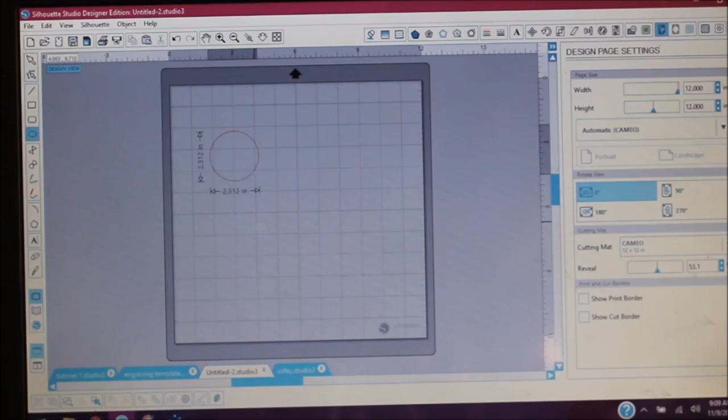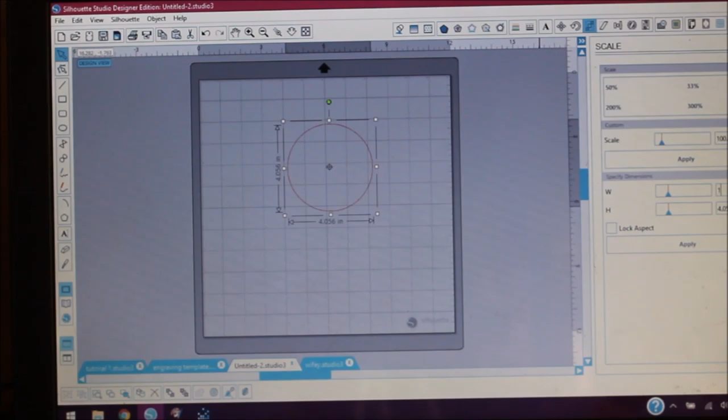Now we're going to select our circle, come up to the scale window, and go down to specify dimensions. We're going to uncheck lock aspect, go into the width and the height, and change that to 1 on both of those. And then we will click apply. As you will notice, when we click apply, it changes our circle into a 1-inch circle, a 1-inch height and a 1-inch width.

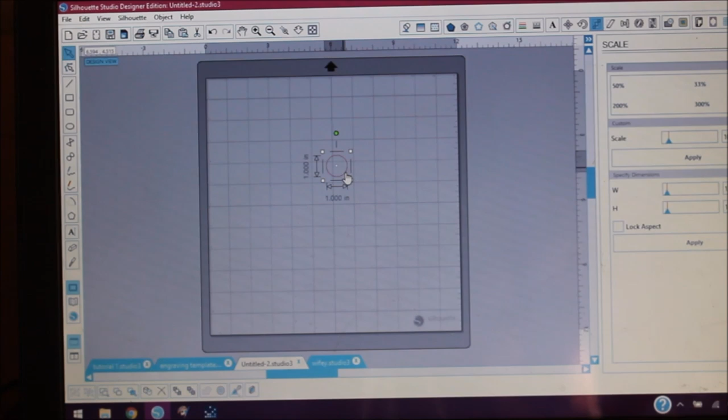Now we want to place our circle where we're going to engrave. When you are engraving, you want to be aware not to put your template or where your piece is going to engrave on up and down columns 1, 4, 6, 11, and 12. This is because this is where your rollers and your black springs are on your roller. If they go over your metal piece while engraving, it will scratch it and your piece will be no good.

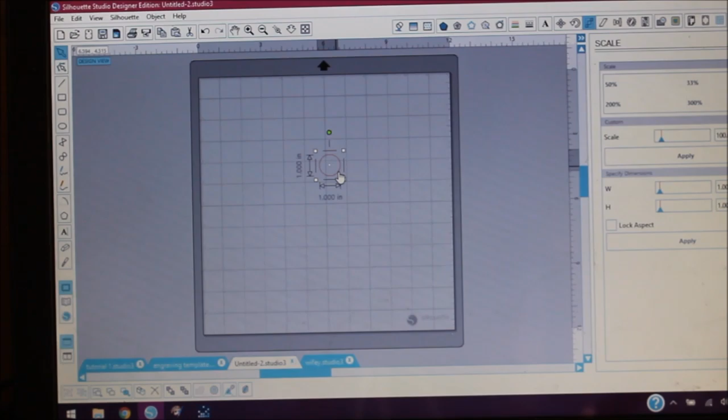Again, that is up and down columns 1, 4, 6, 11, and 12. So now we're going to move our shape. I'm going to go to column 5, and I'm going to go to about row 3.

Now what we're going to do is place our contact paper on our mat so that we can cut out our shape, so we can begin to get our blank placed properly. Now that we have our contact paper cut, we are going to place it on our mat. I know that I have my shape on column 5, row 3, so I want to make sure that my contact paper covers that.

So I'm going to place down my contact paper, sticky side down, your paper side will be up. Take your squeegee after you place it and go through to make sure that your contact paper is as flat as you can get it, and that it is secure to your mat.

It doesn't matter how big or small you cut your contact paper, as long as you have enough space to cut out your blank shapes that you're going to be cutting or engraving on. Just be sure that wherever you're going to place your blank on the mat, your contact paper covers that section.

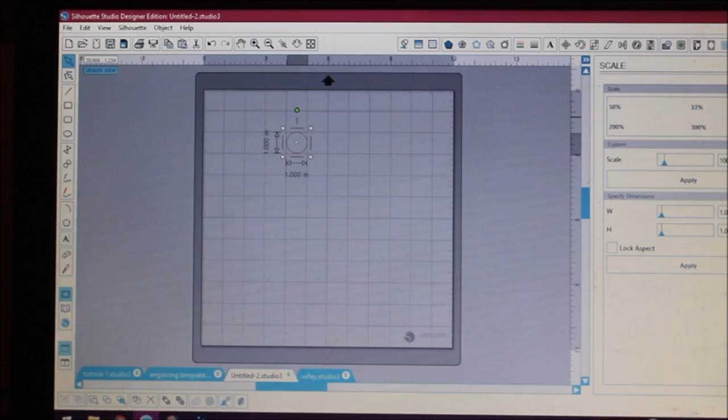Now that we are back in Studio, we're going to select our shape and go over to our cut settings. Make sure that our shape is selected, and we're going to choose Cut Edge. Then we'll go down to Material Type and choose Coverstock.

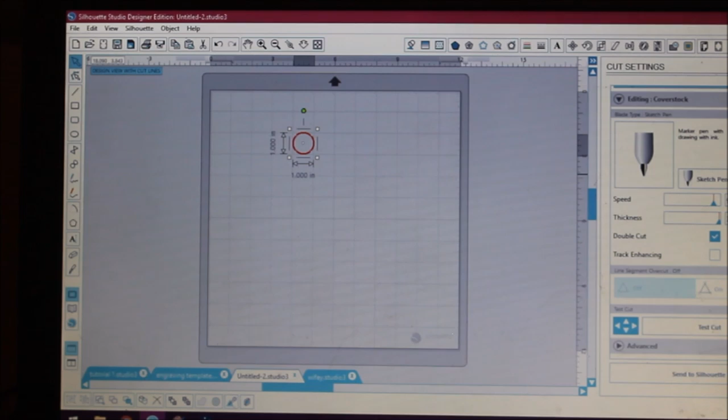Make sure under Blade Type that you click the drop down arrow, and make sure that Sketch Pen is chosen. For your speed, you want to make sure that your speed is 9, your thickness is 33, and double cut is chosen. Now our mat is already loaded with our contact paper, and we're going to send this to Silhouette.

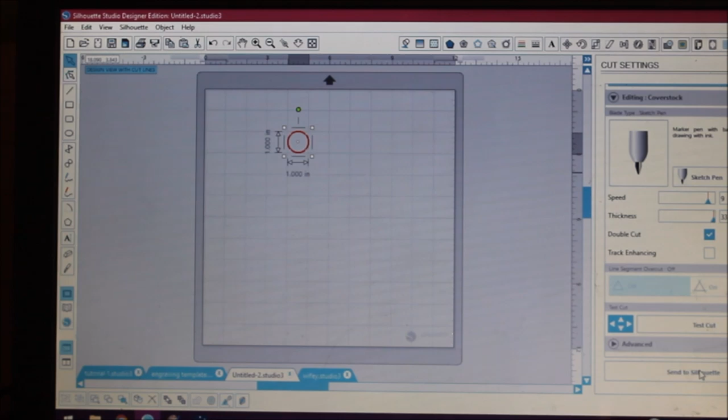What this is going to do is cut the top layer of the paper, not the adhesive side of the contact paper. It's going to cut the paper layer so that when it's done, we can take our X-Acto knife, the tip of it, and pull out that 1-inch circle shape from the paper part of the contact paper. Now let's go ahead and send this to Silhouette.

Now our engraving tip will make our shape that we made on our Silhouette Studio. As I said, it will only cut the top layer, which is the paper of the contact paper that we have. Now that it has cut the shape out, we're going to find the shape, and then we will take our X-Acto knife and just barely lift up on it and pull.

Our top layer - if it seems that it doesn't want to give, just run it back through your machine. But you shouldn't have a problem. You see how the 1-inch circle paper layer of the contact paper is coming up with no problem. Just throw that away. And now you're left with a 1-inch circle on your contact paper where your blank is going to sit.

Now we have to take a couple more steps. Now our adhesive side is showing, and it is up. Now we're going to take the double-sided tape. We're going to take a couple of strips, and we're going to put it over the shape that we just cut out.

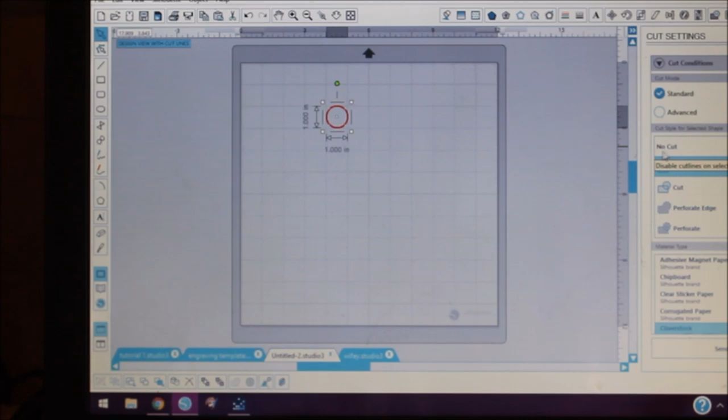Now that we are back in Silhouette Studio, you should still be on your cut settings with your shape selected. What we're going to do is take care of this part. We're going to go to our cut settings and click no cut. This is going to ensure that your shape does not cut again. If you do not do this part, you will mess your blank up.

Okay, now you're going to go into your hard drive or your library and get the design that you're wanting to engrave.

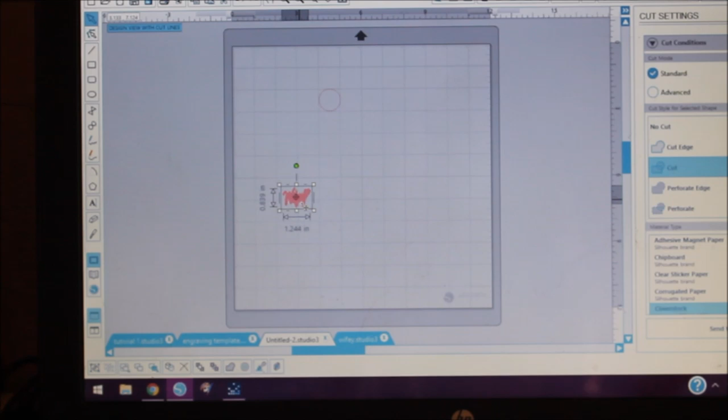Now we're going to move it up to the blank, and as you can see, it is still too big for the shape. So we need to resize this a little bit more. Let's zoom in so we can get a better look.

Now technically the design will go ahead and engrave and it will be perfectly fine, but I want to give it just a little bit more room, so I'm going to click a corner node and resize it down a little bit smaller. I want to place it on the blank where I want it.

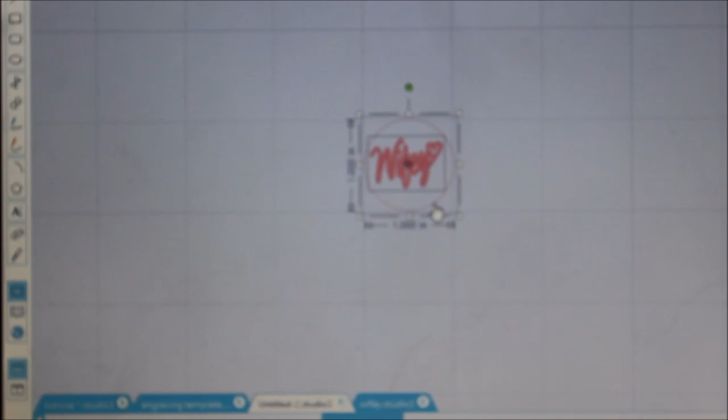I see that it needs to be moved over a little more, so I'm going to reselect everything. Now if you reselect everything, you're going to have your shape selected as well. So you want to put your mouse button on your shape, hold down the shift key, and click the left mouse button. This will unselect the shape.

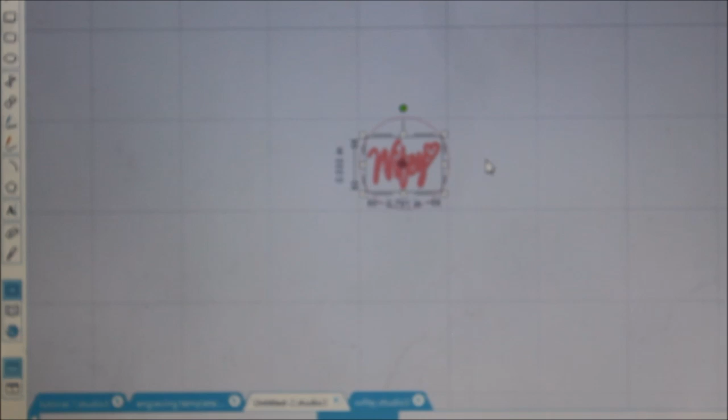Now I want to move over the design just a little bit. Alright, I see that I want to move it down just a little bit. This is just going to be preference and trial and error of how you want it. So I believe that is good to go.

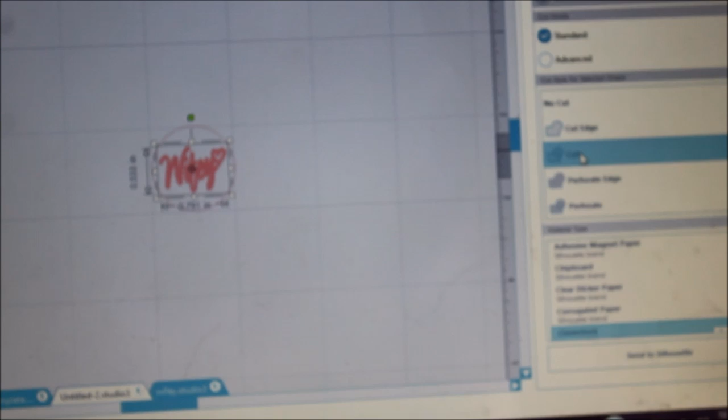Now we're still on the cut settings, and if we select our design, make sure that your design is on cut, not cut edge, but cut. Make sure that your material type again is cardstock. Your speed is 9, your blade is sketch pen, your thickness is 33, and you've chosen double cut.

Because I have 2 designs, one on top of the other, each design's going to double cut, so actually you're getting 4 passes through the machine to give you a deeper engrave. Once you're happy with your placement and you have all your settings ready to go, you can send it to Silhouette.

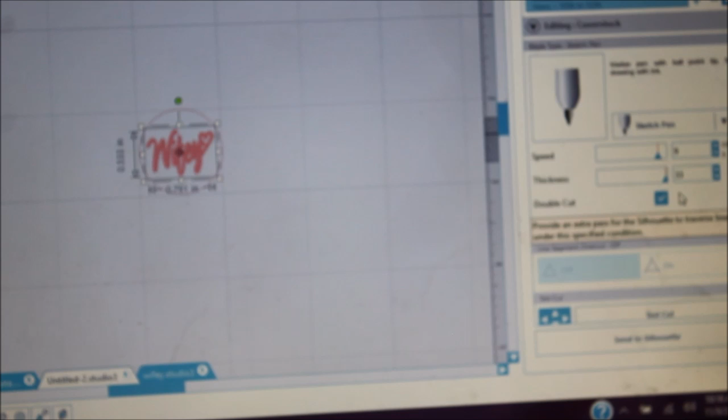I do want to say though, if your design is more intricate and it's a lot of smaller pieces, you can turn your speed down to about 6. Sometimes I choose 4 depending on how small things are, like small designs such as hearts if they're really, really tiny. So between 4 and 9 is a good speed depending on what your design is.

Now we're going to send it to Silhouette and wait for it to finish engraving. Once it is done, do not unload your mat. Check your design and see if you want to send it back through for a deeper engrave.

If you are satisfied with the design, you can take it off. You may notice a little bit of dust from where it is engraved. You can simply wipe that off with your finger or a polishing cloth.

I do recommend, if you are selling or giving these as gifts, to purchase an inexpensive polishing cloth. You can pick one up at Hobby Lobby for about $6, or you can also pick up a polishing cloth in the shoe department at Walmart, where you find the shoe polish. They have a little kit with a polishing cloth in it that works well for it too, which is about maybe $2 and some change.

Either way, you want to be sure that you polish your finished design, whether you're selling it or giving it away.

Now we will wait for the design to finish engraving, and it may take a few minutes because, remember, you are doing 4 passes through your machine since you have 2 designs, one on top of the other.

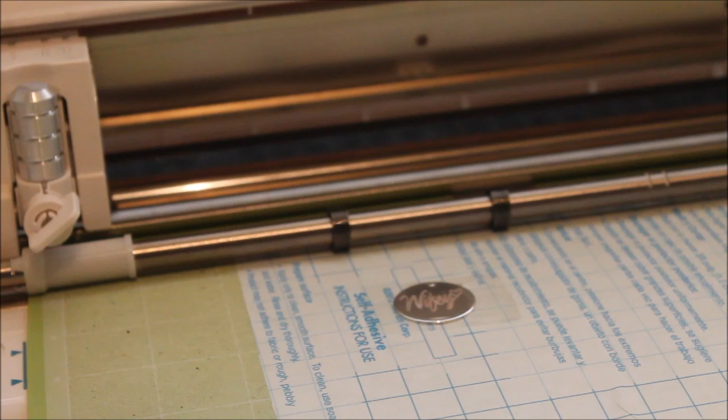Now that your blank is finished engraving, you want to check to see if it looks how you're wanting it to look. If it does not, and you want to engrave a little bit deeper, go back to your Silhouette Studio software and click Start. It will send your mat back through and engrave again exactly where it engraved the first time. If you are happy with it, go ahead and unload your mat, remove your blank, polish it, and you can add your jump ring, your split ring, your necklace, keychains, whatever you plan to do with it.